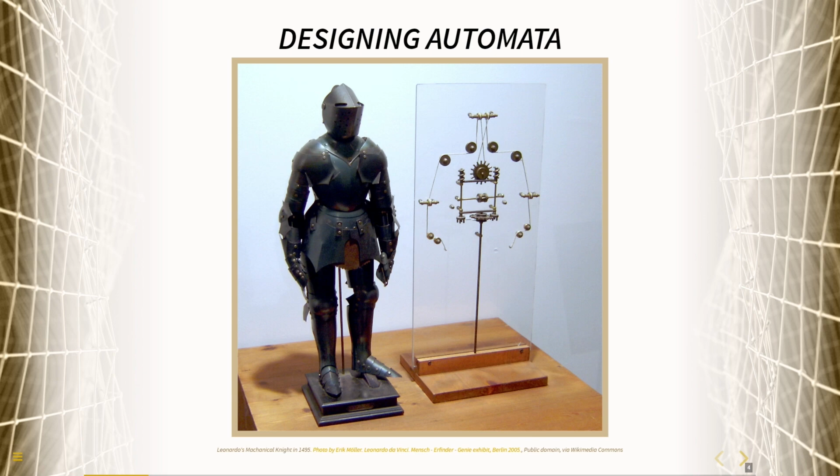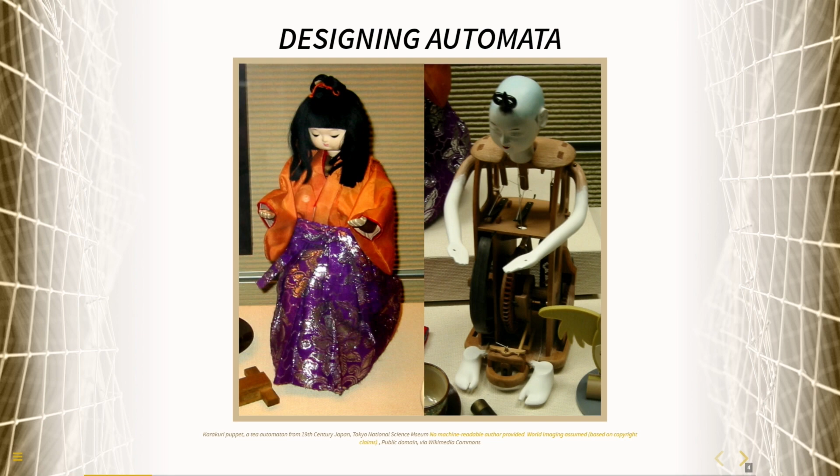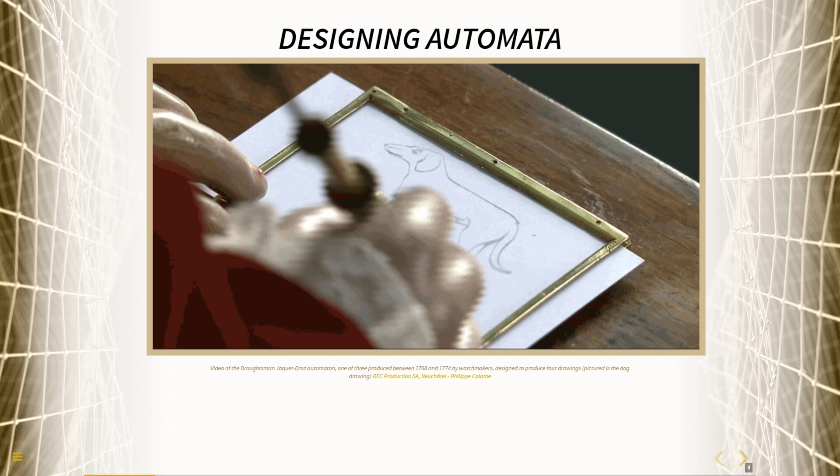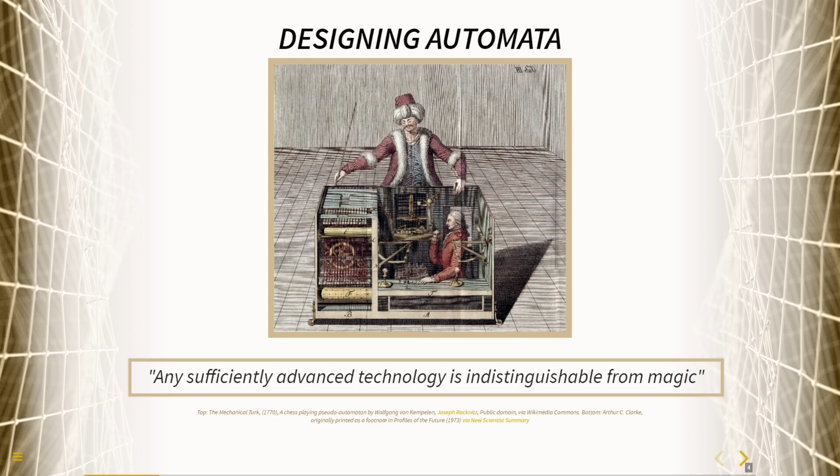Which is an interesting juxtaposition because of this Arthur C. Clarke quote about technology: any sufficiently advanced technology is indistinguishable from magic. Oftentimes when we look at different kinds of tools, especially modern day AI tools, they sometimes feel magical. But I want you to remember that under the hood is human effort, and under the hood are different kinds of constructs that we have actually put together.

In 1948, Norbert Wiener introduced the concept of cybernetics. He wrote this incredible book called Cybernetics, or Control and Communication in the Animal and Machine. He was a polymath, so this spanned so many different concepts and disciplines. At its core, you can define cybernetics as the study of controlling the flow of information in systems with feedback loops. He had many applications outside of computing, but I'm going to focus on the applications within computing for our conversation today.

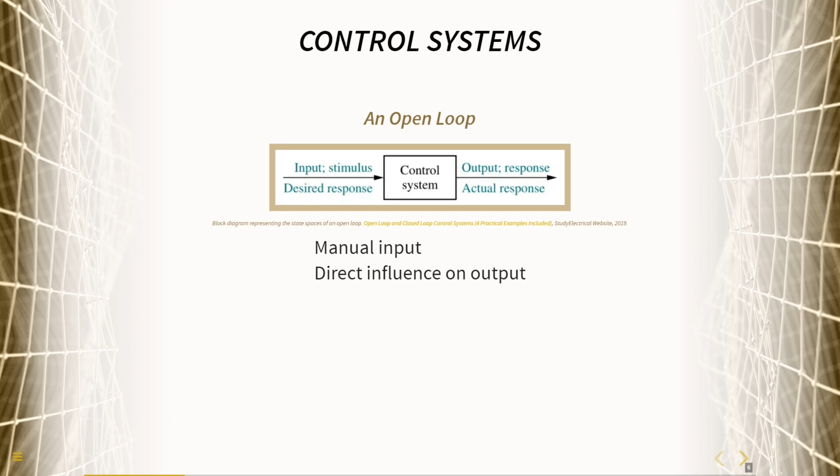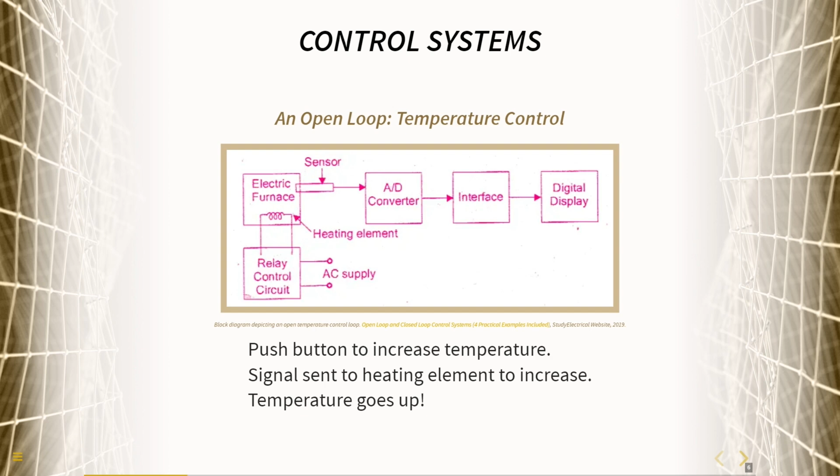You can think of this in terms of a manual input, a direct influence, and an output. This is also known as an open loop. For example, a temperature control system that uses an open loop would simply have a push button to increase the temperature, a signal would be sent to the heating element to increase the temperature, and the temperature goes up. Easy peasy. But what if you want things to adjust, if you want the world to adapt to your needs?

Wiener introduced the concept of feedback in control systems. This was revolutionary at the time. It meant you could take the output of that second state and use it to influence the entire action all over again. You could close the loop, so to speak.

A closed loop system has a reference signal, this input you start with. There's an error detector that looks at the comparison between your feedback and that reference signal, and then it moves through the system to give you a particular kind of output. If there's some difference between what you want and where you started, the desired output is updated - an adjustment is made.

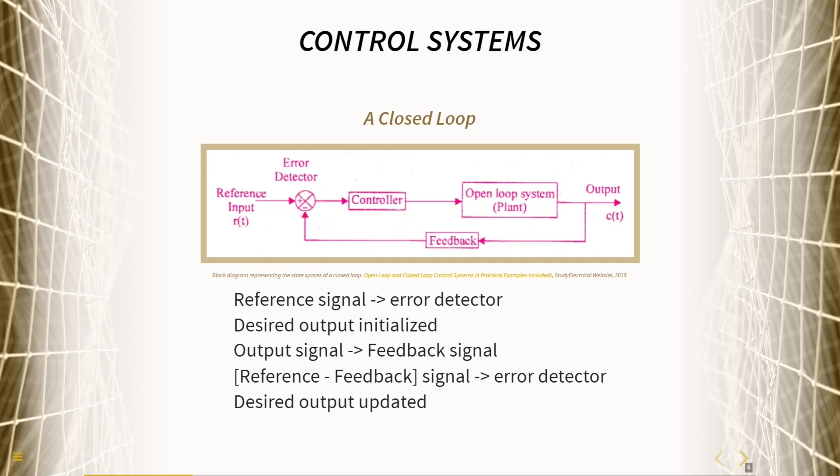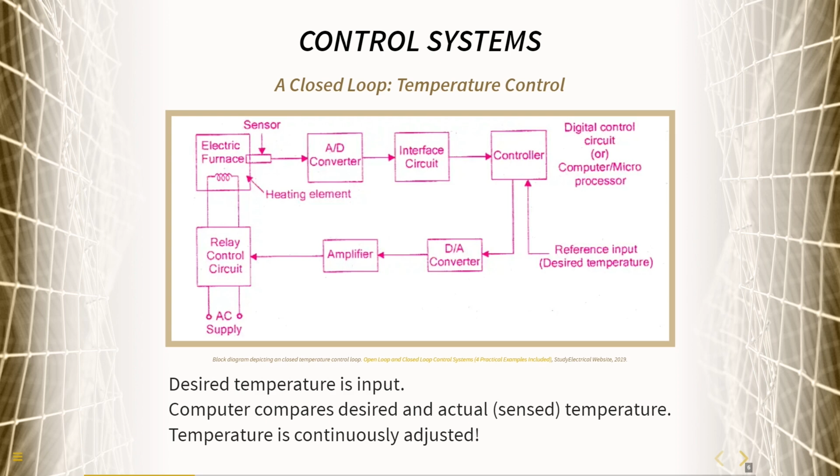Your desired temperature is input - you can see in the bottom right that you can put your reference input into the controller. The computer then compares your desired and actual sensed temperature. There's a sensor actually looking around going, is it 62 degrees or what is it now? Then the temperature is continuously adjusted. This is how modern thermostats work. This idea of feedback is incredibly powerful because you can now close that loop and make continuous adjustments, monitor, and really make changes in the system as you're working it.

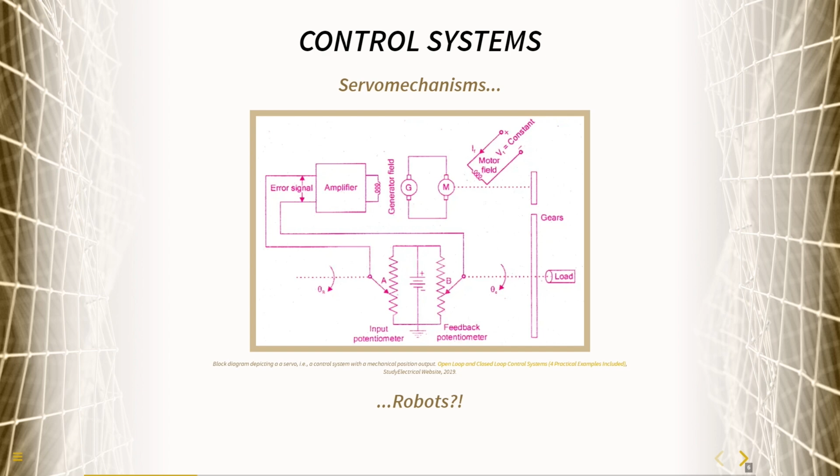This really laid the foundations for the concept of servos - these are essentially control systems with a mechanical position output. It meant your input was actually saying, okay robot, move there. There's a lot more in between servo mechanism and robots, but that really laid the foundation for a lot of the ways we think about and build robots even today.

So let's spend some time conceptualizing automation. Automation can be defined as the use of technology to perform tasks with reduced, sometimes no, human assistance. But that isn't just a binary thing - it's not yes or no. There are different levels of automation that we can go through.

Basic automation involves simply automating a simple repetitive task - you can think of this as a forklift that just picks a box, puts a box, picks a box, puts a box. From there, we can bump up a level and think about process automation - how can we actually automate a complex set of workflows across systems. Modern software engineering involves a lot of process automation where we say, I'm going to make a change in the code here, I want it to do that over there, and when I deploy my code to a server, the entire chain of actions should happen.

You probably use a lot of different kinds of automated processes in your own work, whether it's something like setting up a calendar reminder, or the moment I invite so-and-so to a meeting, send them a Zoom invite. These are very basic process automation examples. Our goal is to get to the idea of intelligent automation. At its core, it's a concept of automated responses that improve through learning from priors and context. So it's that feedback concept all over again. At the core of a lot of what we talk about is feedback as well as contextual awareness. Let's look at the different genres of AI that take these ideas into account.

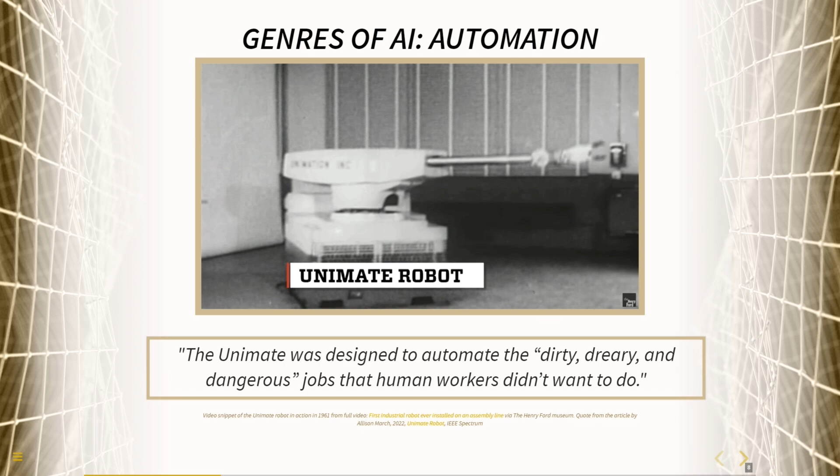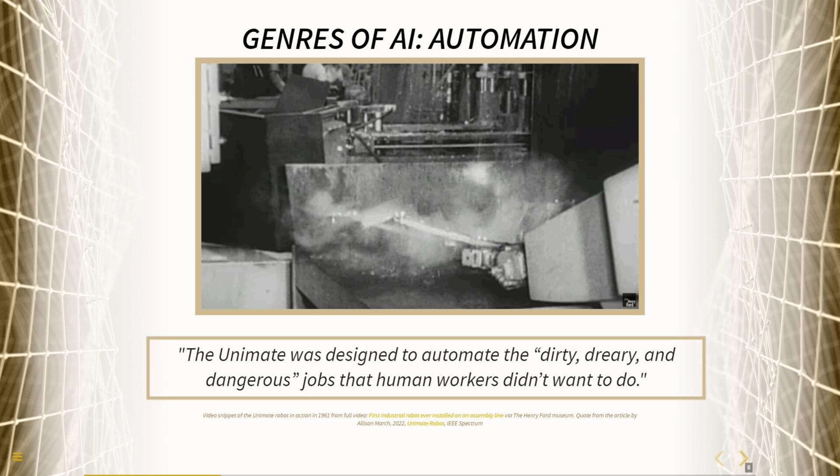First, let's think about automation. The first industrial robot was the Unimate, designed to automate the dirty, dreary, and dangerous jobs that human workers didn't want to do. Remember, someone had to define what those jobs were. I chuckled when I saw a marketing image of the same robot serving drinks at a bar, because apparently that was also an example of a dreary job somebody didn't want to do.

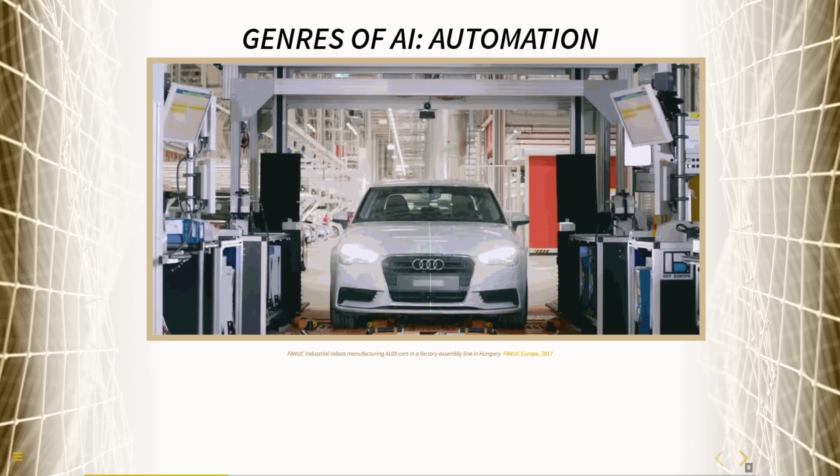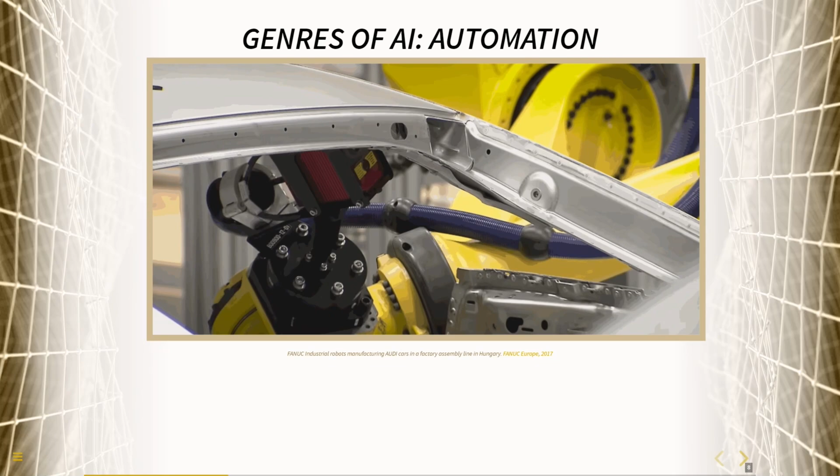There are industrial robots manufacturing entire cars in factories. In this particular case, this is the Audi factory assembly line in Hungary. You can see, from start to finish, very many different kinds of automation, coordination, and synchrony that have to happen in order to go from metal parts to a moving car.

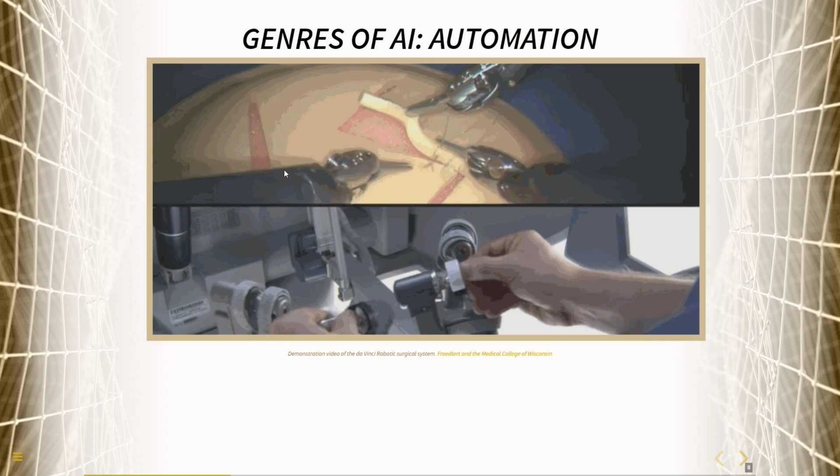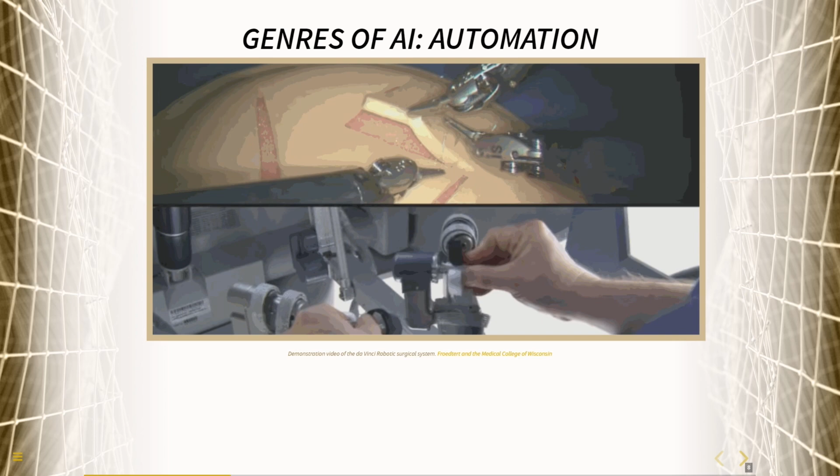A lot of these industrial robots, I think it's important to remember, are actually fairly specialized. In this case, we're looking at the Da Vinci surgery robot, designed for very specific types of human-robot interactions. It aids a surgeon in trying to do specific non-invasive surgery tasks.

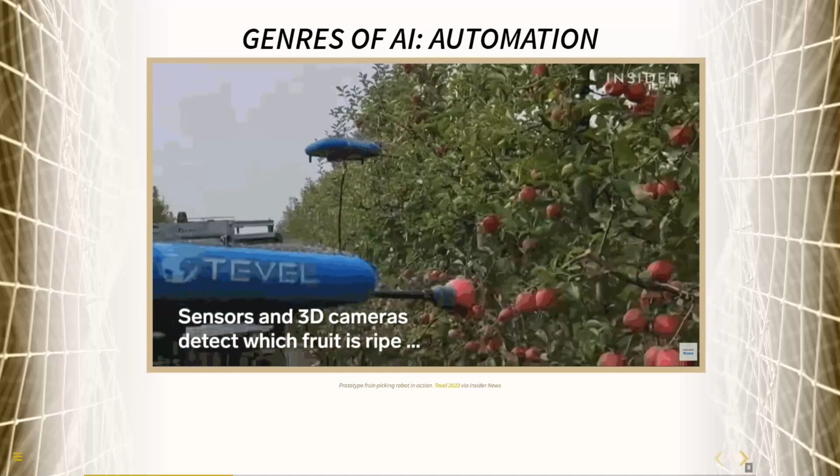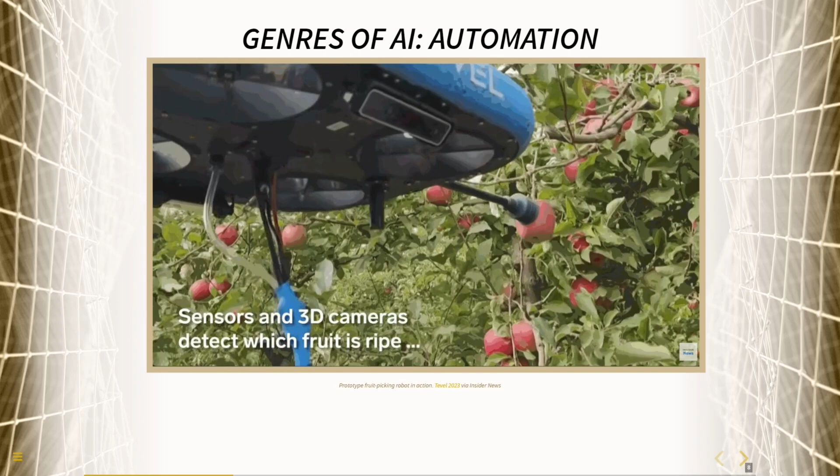In that sense, industrial automation is always a specialized task, as we map workflows to determine optimal modes of production in very specific contexts. Each of these examples required someone to have a very specific understanding of how humans performed these tasks, in order to determine what to automate. What constitutes that tedious, dirty job as something worth automating? Later on we'll talk about the impacts of automation on labor and society. But I want you to keep in mind this idea of task mapping as something critical to producing specialized technologies like industrial robots.

We're not quite yet at the point where we're having robots making robots, but you can see how that is sort of the general trajectory in which things are moving, for better or worse. We'll dig into this a little more another time.

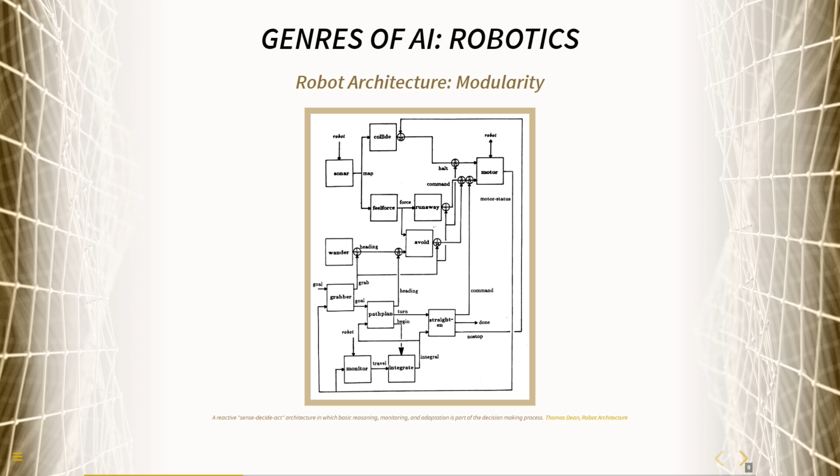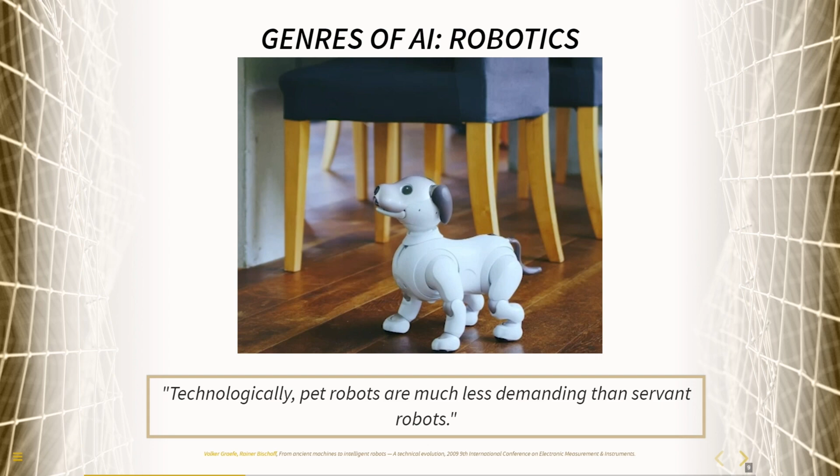Let's look at some examples of robots. One of the earliest examples I came across was the Aibo pet robot dog, described as much less demanding than servant robots. The Aibo was really meant to provide companionship. The goal wasn't necessarily to perform specific tasks, although I hear it can jump and pretend to pee and responds well to pets. But really, it's a general purpose technology, meant mostly for fun and curiosity, and maybe even just a little delight.

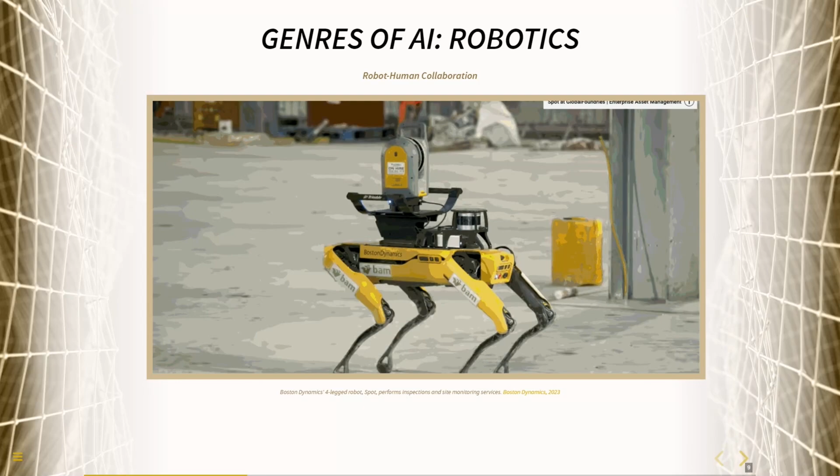But if we look at that same form factor, Boston Dynamics has gone in a completely different direction with their four-legged robot. In this case, we're looking at Spot as it performs inspections and site monitoring services using a suite of complex sensors and spatial mapping to detect issues or determine what comes next.

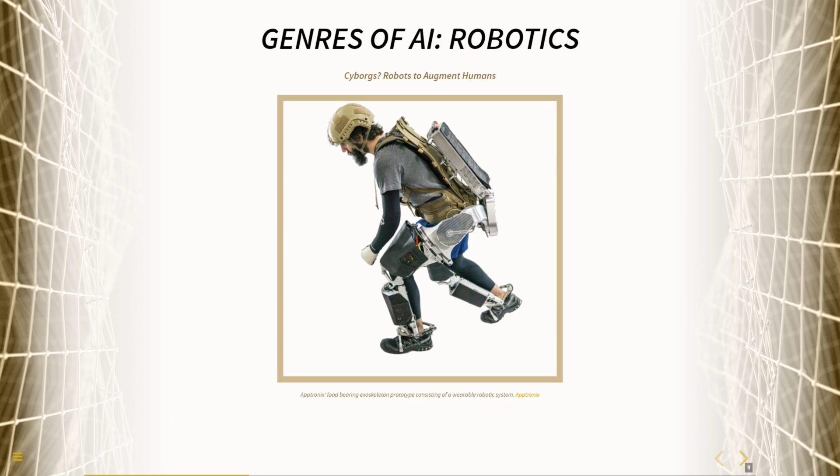I think it's a little bit amusing because in some ways we're already starting to touch on this concept of cyborgs, where robots are really there to augment humans.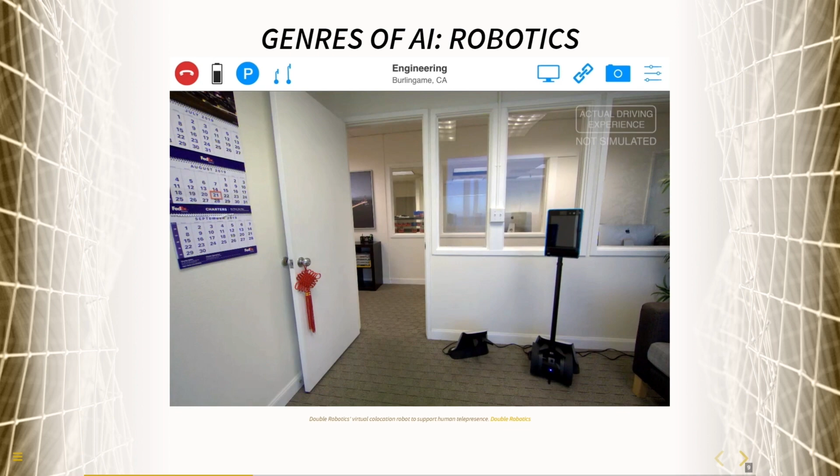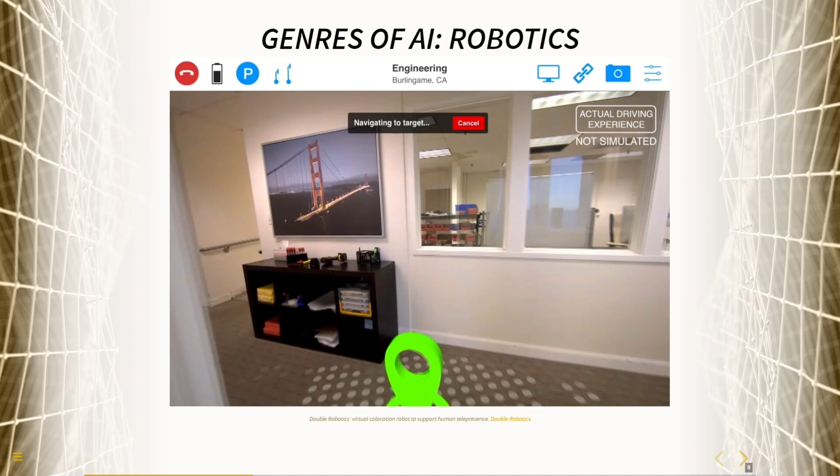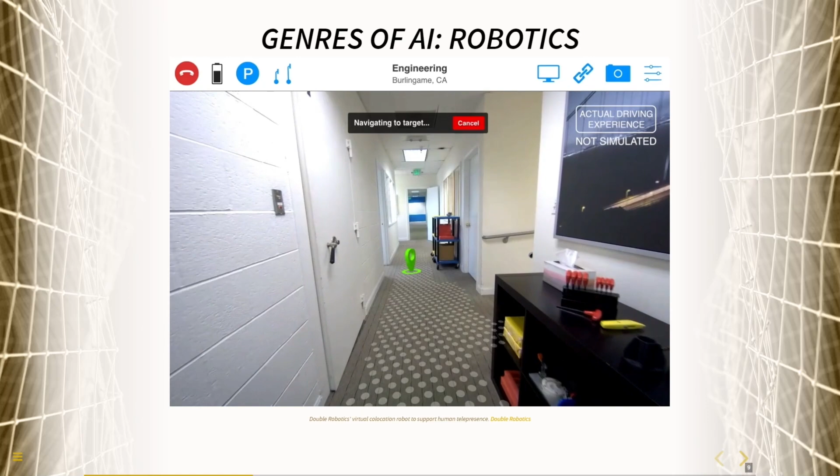A different form of augmentation, which I think is equally interesting, is Double Robotics' virtual co-location robot, designed to support human telepresence. In this era of remote and hybrid work, you should theoretically be able to log into this little platform and drive yourself around as you interact with coworkers and go about a normal workday. So here we see robotics being used to collaborate with each other and augment our own experiences in the real world.

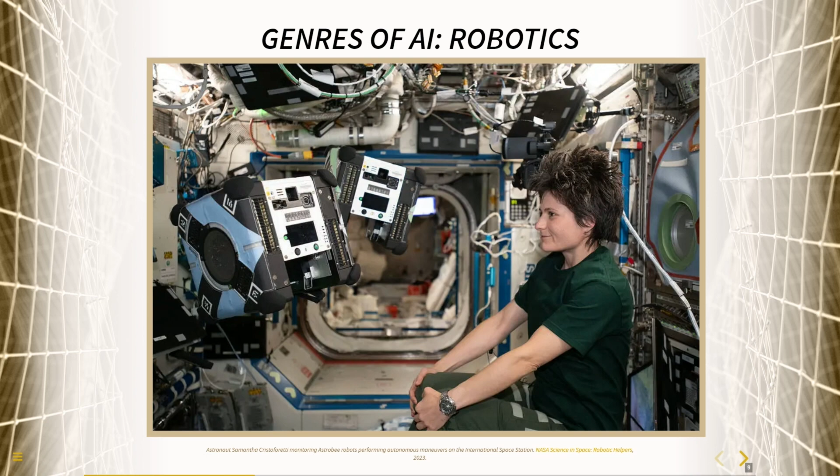We've also used robots to explore space a bit more experimentally. There are examples that are much more grandiose, like the robotic arms on the International Space Station, but here's one that's actually an autonomous robot. The Astrobee robots are performing different kinds of maneuvers and experiments on the International Space Station, as we try to think about what role different kinds of robots can play in our work, both here on Earth and in space.

So we've built a whole bunch of different kinds of robots. A lot of them are fun, a lot are interesting, a lot are still conceptual, but we're beginning to see the different ways in which robots can actually start to integrate into our daily life.

One of the clearest examples of this is in the subdiscipline of autonomous vehicles. If we go back to the idea of sense, decide, and act, an autonomous vehicle would theoretically be able to just go straight, and the moment it sees an issue, it should be able to steer right or left, adjusting its movement as it goes down a path.

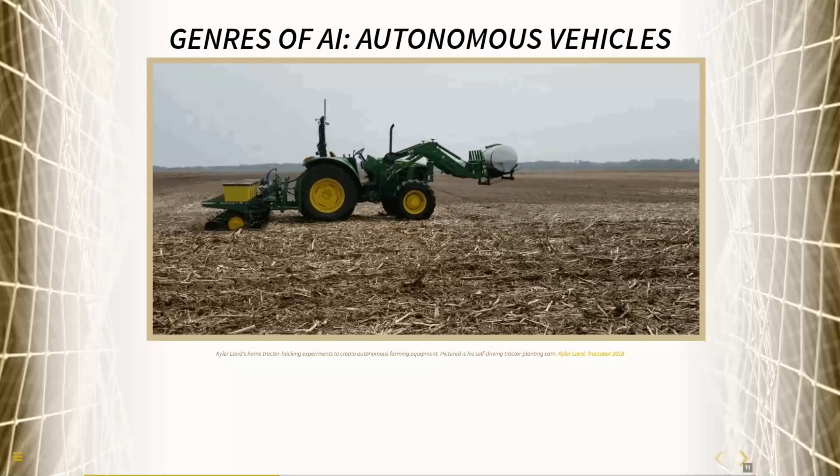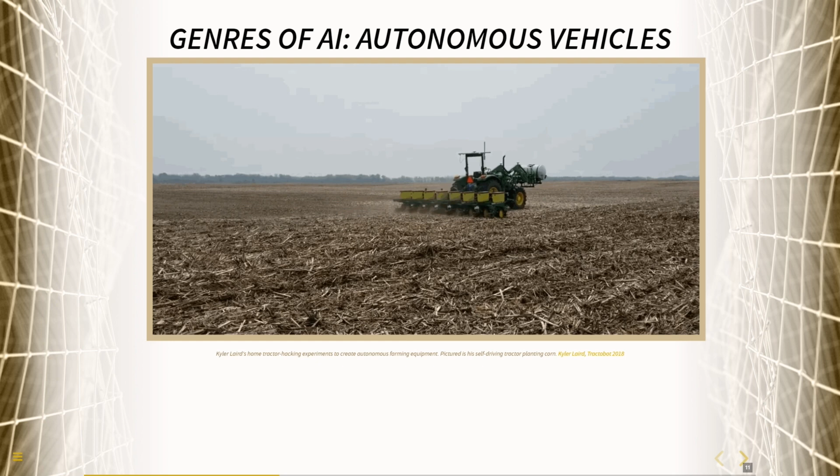We've done this in many different kinds of contexts. One of my favorite examples is Kyler Laird's home tractor hacking experiments, where he'll stick together a bunch of microcomputers and build himself a self-driving tractor that plants corn.

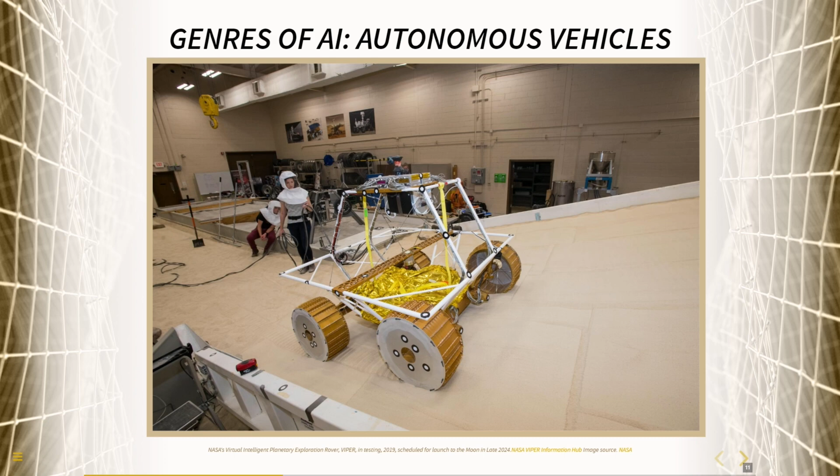We've seen much more complicated examples of autonomous vehicles. In this case, Anduril has developed an autonomous air vehicle, shown in a war game style demonstration in which it can sense, decide, and act. And again, we continue to use different kinds of robots to explore space and beyond—here we're looking at NASA's Viper rover, scheduled for launch to the moon in late 2024. But at the core, a lot of them are using the same common concepts.

So there are analogs for this in non-vehicular examples as well. They're just not standards yet.

So the core concept underneath an autonomous vehicle is this idea of the operational design domain. If I have a vehicle, can I detect the environment, geography, time of day, traffic, objects, even people, to be able to say, okay, here's where I'm working within? And then that is really what is used to drive decision-making in the vehicle itself.

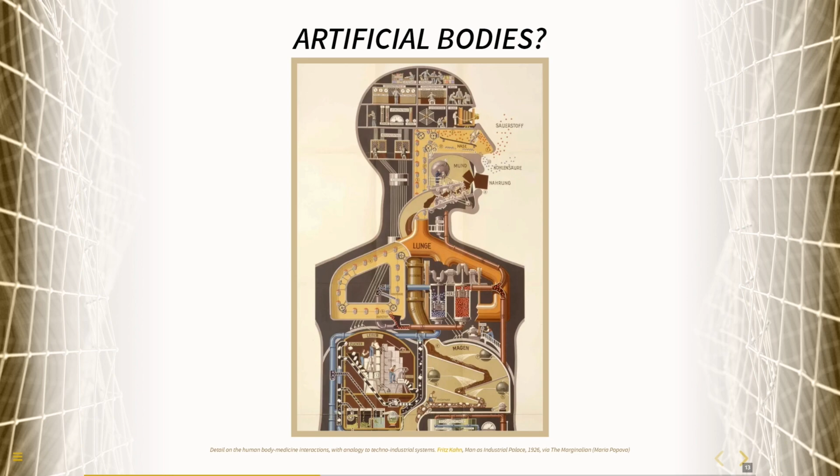In a lot of ways, some of our biomimicry has been doing a little bit of this, right? We've been taking this very squishy concept that is the human or even the mind, and then trying to reduce it or abstract it into these very basic components that we can then codify as modules in a system. This is really hard, right? It's also not clear whether or not this is actually what we want to create. Are these the cyborgs that we're intending to create, or are we actually just inadvertently mimicking parts of ourselves that we either just understand enough to be able to write code about, or maybe sometimes don't understand the full implications of?

At the same time, there are a lot of really inspirational examples, including from the biomechatronics world, where people look at how to actually create human-centered prosthetics that represent and reflect what people want from their bodily augmentations. In so many ways, we are trying to think about what it means to not just create artificial intelligence, but also these artificial bodies.